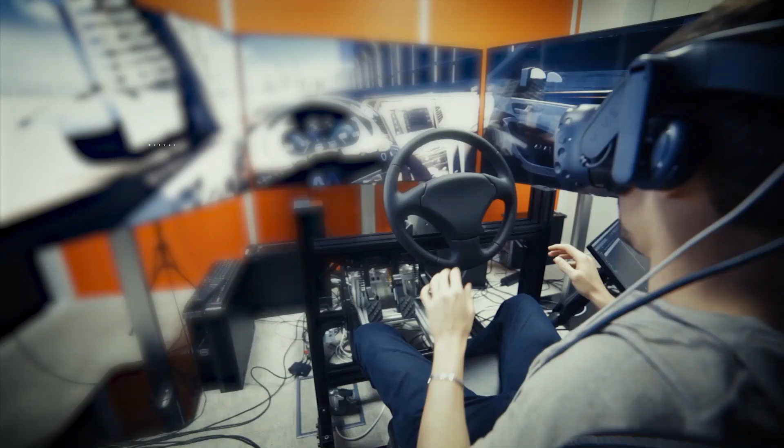ANSYS VR Experience brings the driver in the loop for human factors engineering, connecting real people with virtual simulated vehicles. This solution enables assessment and anticipation of drivers' reactions in any driving situation.

VR Experience recreates a lifelike context to foster drivers' immersion, including realistic driving simulation, scenario and traffic variation, and the shift from automated driving to manual driving, as experienced by test drivers in an accurate and interactive virtual cockpit.

From this, it is easy to monitor situational awareness in the vehicle and the related human reactions, including emergency management and takeover efficiency, and to anticipate situations of foreseeable misuse.

Virtually test and improve the vehicle feedback according to the test driver's behavior and takeover time for haptic, visual, and audio warnings.

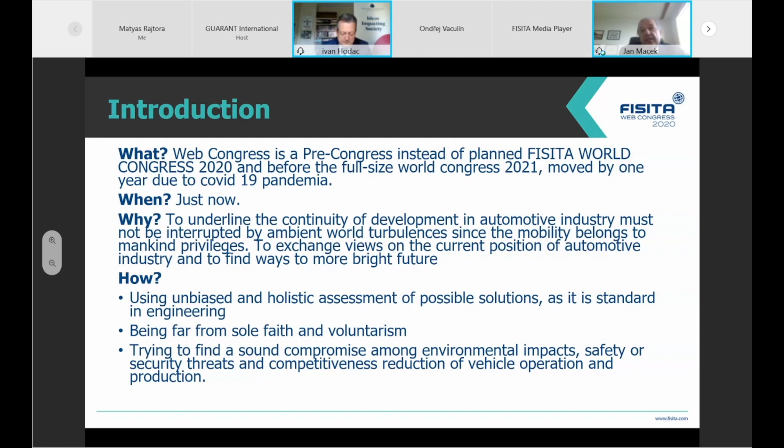How to do it? I think engineers should use unbiased and holistic assessment of possible solutions. We should be far from sole faith and voluntarism, which is not based on the laws of nature, and we should try to find a compromise among all the variety of conditions to which vehicles and mobility tools are subjected.

It is only a technical background, but we know very well that very famous V-shape going from concepts to details of parts and then back to product - any software company, any developer in the automotive industry knows this very well today. Front loading by means of simulation and predictive methods is very important.

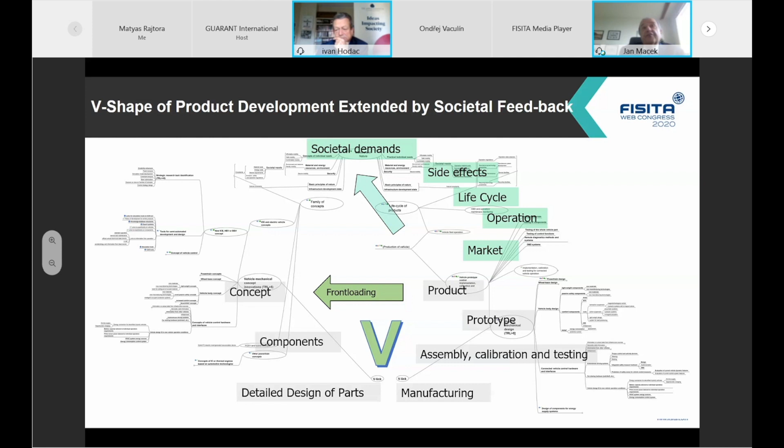to accelerate the concepts. What is also very often used in such a structured way is a path from product over market to life cycle, covering operation, which causes side effects. These side effects are reflected after some time by societal demands, by governmental or higher-level regulations, and also customers' expectations based on media presentations and so on. This is, in fact, like an A-shaped roof for this well-known V-shape.

Of course, the management of any OEM and any supplier of parts uses an intuitive or scientifically based approach from this A-shape. But what we need, and what this Congress stresses, is that we need very strong feedback to the left-hand branch of the A-shape, because the natural feedback, which is caused by laws of nature, is too slow.

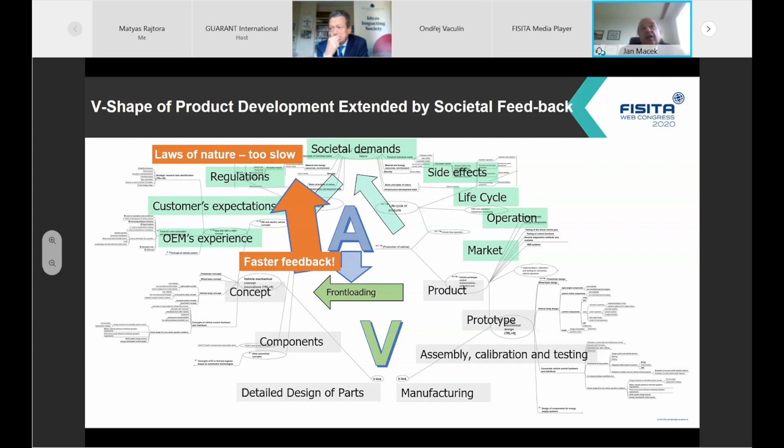So faster feedback from reality, from feasible solutions, should be applied to regulations and customer expectations. I hope that we can answer some of these questions through the papers that will be available, first of all through the keynote speeches which will now follow.

The first one, as you can see, will be Ivan Hodáč, followed by Christoph Gümbel, Dino Flor, Dirk Lappe, and at the end, Martin Hrdlička.

And we are looking forward to the following discussion, as it was already mentioned, with Ondřej Vaculín. So the first referee of keynote lectures is Ivan Hodáč, and I would like to ask him to start with his lecture.

I'm not going to talk about technical issues. I would like to put the situation in which we are today into perspective. The industry is probably going through its most important transformation ever since I remember, and the challenges that we have today are enormous. Let me enumerate them. We know them, but I would like to put them into perspective so we understand in which framework we operate today.

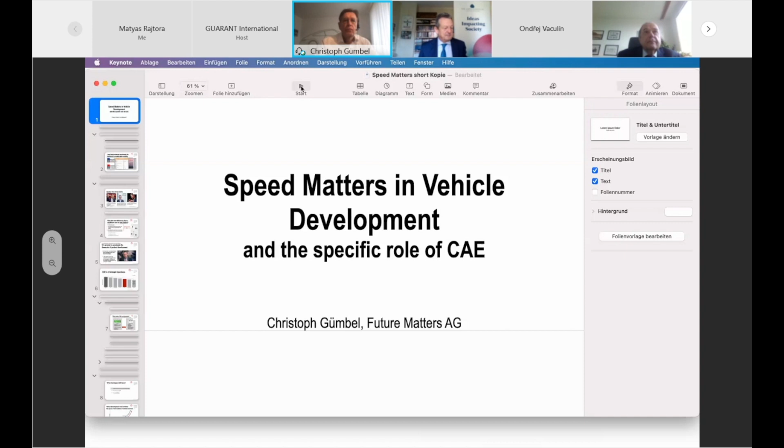That was just a perfect introduction to my presentation, but to what I would like to show you. So I'd just like to start here. I think because time is so tight, I would like to jump directly into the topic and show the first slide.

This slide was just mentioned, or explained almost, by Hodáč. So what do we see? We see a lot of pressure that is generated by legal requirements, these CO2 limits or quotas for importers with respect to electric vehicles, or the discussions in many countries to ban ICE vehicles, which starts in Norway.

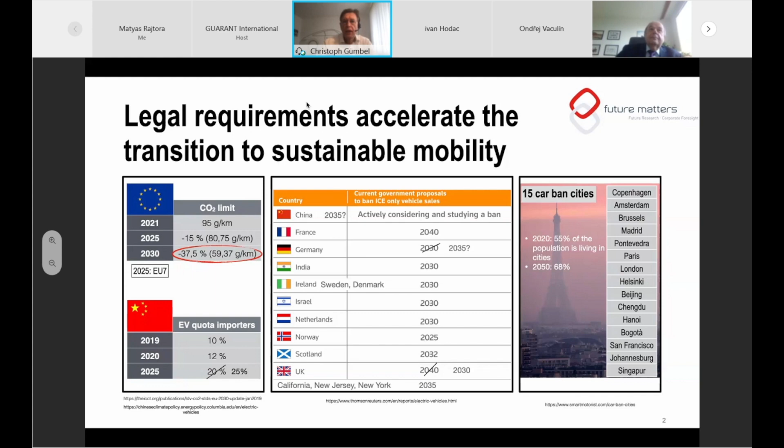We had the discussion with UK, they said okay, they want to start in 2030. We had the discussion with California, New Jersey, New York, they think that they will start to ban ICE vehicles in 2035. And it was also just mentioned that many cities would like to ban ICE cars as well. So this creates a lot of pressure, and we see this.

I've had some quotes from three CEOs. Herbert Diess, who is the CEO of Volkswagen Group, says the world is on the move, the storm is just beginning, the big question is, are we fast enough?

Or Markus Duesmann, the new CEO at Audi, says Tesla is two years ahead - when he says officially two years, perhaps it's a little bit more in terms of computing and software, and in autonomous driving as well. And Ola Kallenius, CEO from Daimler, says there will be no keeping on like you have been doing until now. So we see a big shift from the traditional engineering to a new world which is driven by digitalization.

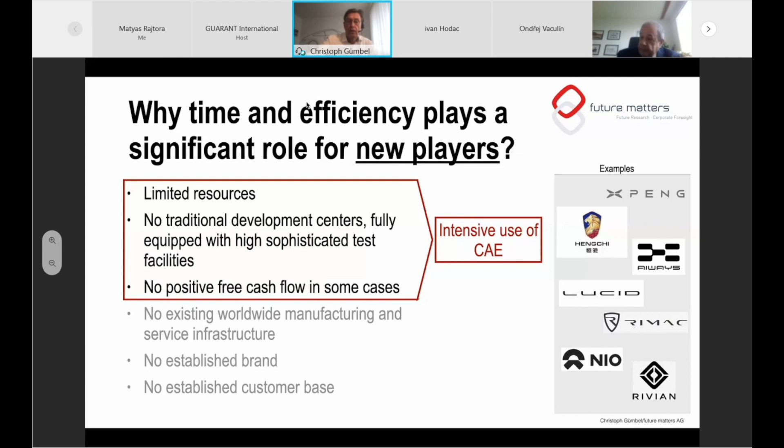So the question is, what happens with the new players? Also mentioned, like Rivian or NIO, Rimac, Lucid Motors, Aiways, and others. They normally have limited resources, no traditional development center fully equipped with sophisticated test facilities, and in some cases still no positive free cash flow. So they are forced to use the most efficient tool, and they're using computer-aided engineering tools intensively.

In January, I visited again Peter Rawlinson, who is CEO and CTO of Lucid Motors. I know him since a couple of years, and I love the discussions with him. He said, okay, we learn so much more from a virtual prototype than from a physical prototype. The reason why we can accelerate development is because we have great confidence in the fidelity and velocity of our computer models.

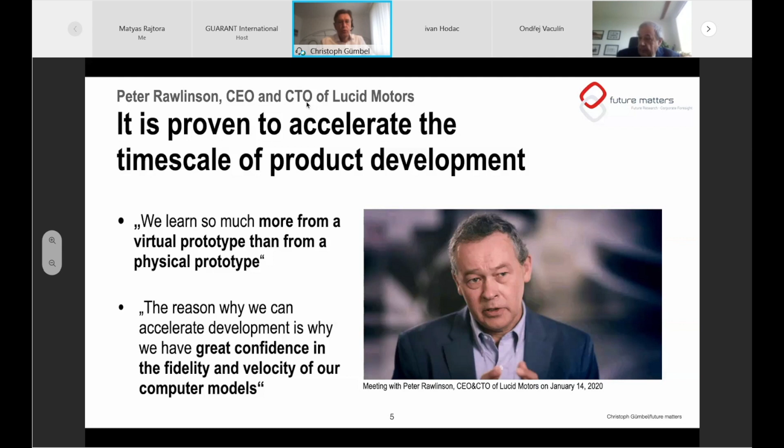So what happens with CAE? CAE is now in a strategic position. What we see in general is we have the status quo, that is what we did with combustion engines and the classical way to develop cars. Then comes the EV. The EV is a little bit simpler, has no exhaust pipe and things like this. They have other challenges, but they have fewer parts.

What we see in addition is shared hardware and software. A nice example is the MEB platform from Volkswagen, which will be shared together with Ford. Another example is software, which it's using from Polestar. Polestar is using Android Automotive. What comes in addition is the over-the-air update.

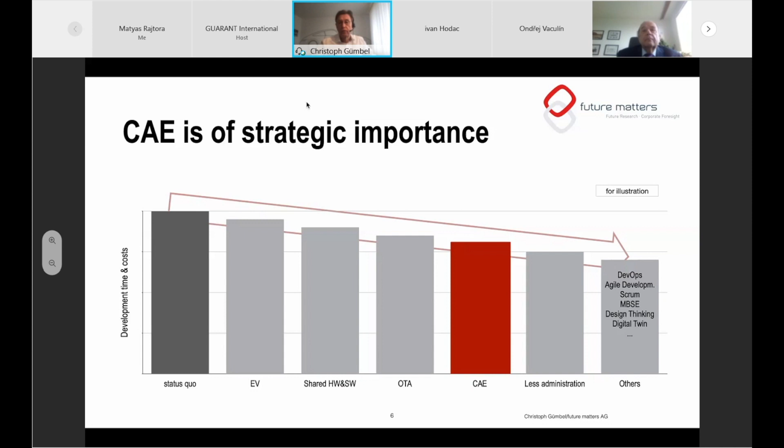Been using this for more than 8 years, and it helps you download software features, also after SOP. That is really disruptive technology. And then CAE and some other things, like less administration, or agile development, Scrum, and so on, design thinking and digital twin. So what makes CAE interesting?

I have a little example. Assume that we have to extend the range. This is the one thing that everybody complains about with electric vehicles, and we have to extend the range with some additional 2 kilowatt hours. So assume the battery price is 100 euros per kilowatt hour, and assume that we produce 300,000 units, lifetime is 7 years, 420 million euros, and we generate additional weight sources.

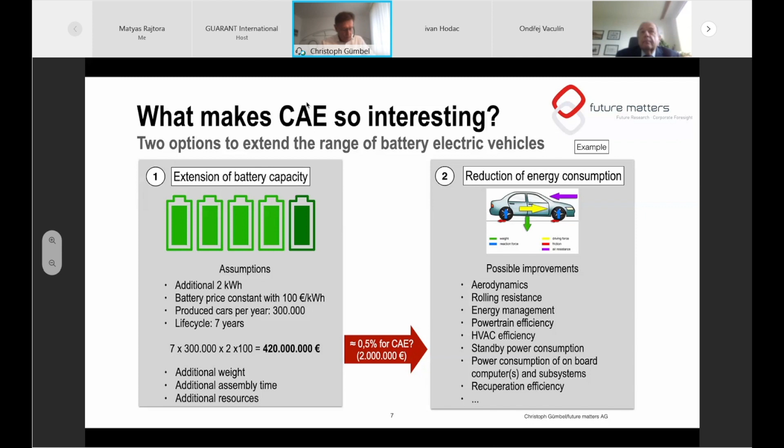And if we take 0.5% for CAE, which will be really a huge amount of money with respect to CAE, with 2 million, and in that case, doing it by computer-aided engineering for rolling resistance or energy management, whatever, HVAC efficiency, then it's really a smart way. And we see that these new players are playing with this tool really extensively.

So the question is, when we would like to use CAE more intensively as a strategic tool, what challenges does CAE face? One challenge is that CAE has to follow the innovation speed. The other one is to increase the process speed and to increase the efficiency.

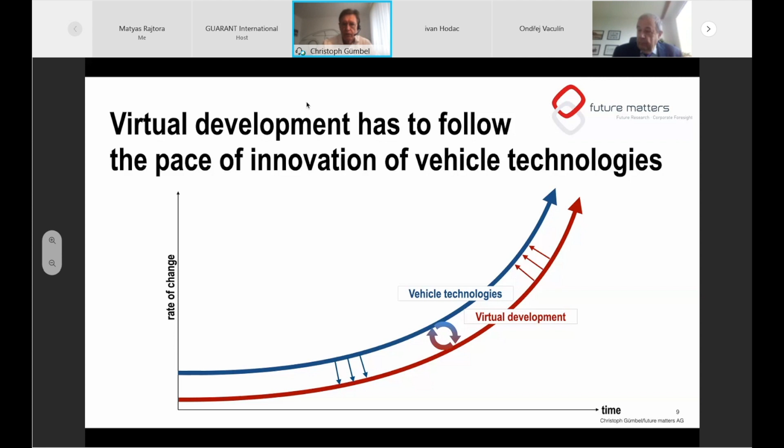So when we have a look at what happens in the automotive industry, we see that the rate of changes is accelerating dramatically, and virtual development has to follow this pace. And even perhaps in the future, as Mr. Hodac just spoke about the pull and push principle, maybe the virtual development process will not only be pushed, but will influence vehicle technology in the future by using artificial intelligence, machine learning processes and technologies. So CAE is an integral part of the development process and has to reflect future vehicle technologies, working hand in hand with the design process, with testing and so on.

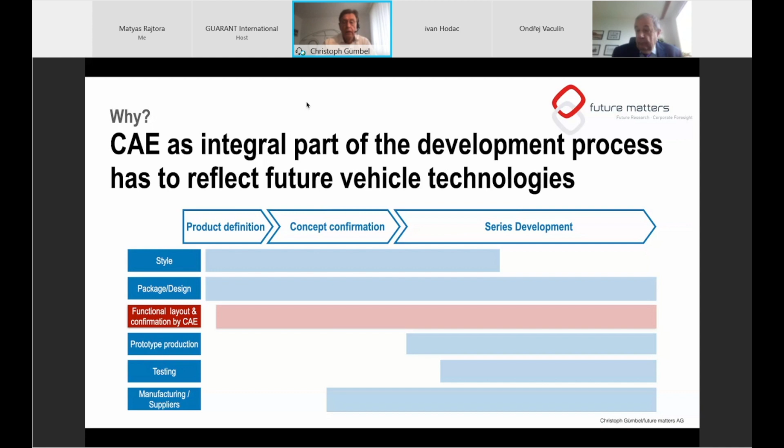So what happens very often, as I've tried to show in this slide, is that we need some information that we have to represent and prepare. Otherwise, our toolbox will not be filled, and then we have a problem with speed, because we have to do everything by classical experimental testing. The tricky thing is that normally the budget is released for a new project when the project starts, but we have to start a bit earlier for validation and procurement, or development of these CAE methods. So you need a separate budget, a couple of years or months, whatever, before.

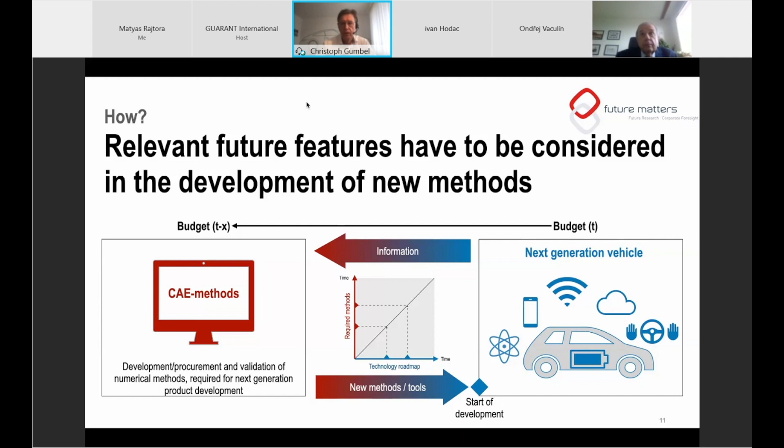So what should the process be? What can we do here? What is the typical process? We have an initial design, then we put all the data into numerical simulation, and the responsible person, the developer, has to wait until the result is available. But he will not stop thinking, so we are here on a critical path.

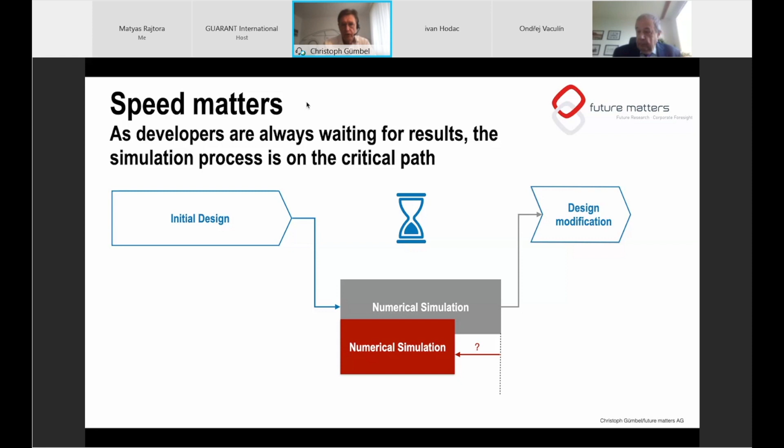Because of time restrictions, I have only selected some ideas on what we can do to speed up the numerical simulation, because one problem is that complexity is even increasing, and as Mr. Hodac just mentioned, there are a lot of legal requirements and different standards to fulfill. This little machine is rotating even faster.

This CAE process, as part of the development process in general, is divided into three main parts: pre-processing where you fill in all the data you need, then the computer which solves all the equations, and then post-processing to visualize the animations and other output. So the efficiency is output divided by effort.

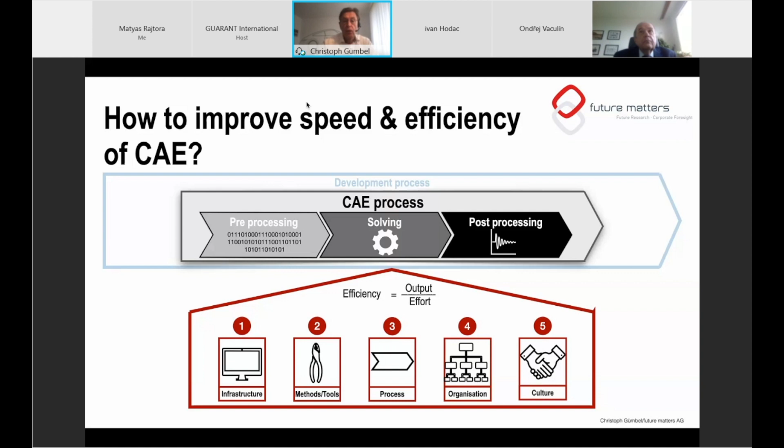So what are the parameters we have? I think we have 5 parameters. This is the infrastructure that we need, methods and tools, then the process itself, then the organization, and what's extremely important besides organization is culture. I would think the importance is growing in this order.

A little example of what happens with infrastructure: normally we have more and more guys creating software and writing software in the office. What we have with driving simulators is central facilities where you have a driving simulator.

When you think about ADAS, for example, with HIL and SIL etc., then you have to wait. You have to book such a facility, a central facility, and that wastes time. So the idea now is to have a downsized, directly positioned desk-side driving simulator.

It's a little bit the idea of a personal computer. In the past you had these host centralized big computers, and you had a terminal. What we have today are personal computers. We have direct access to everything we need, and what is centralized is the computing. We could do the same here.

That helps the engineer using some software to directly test this in the office.

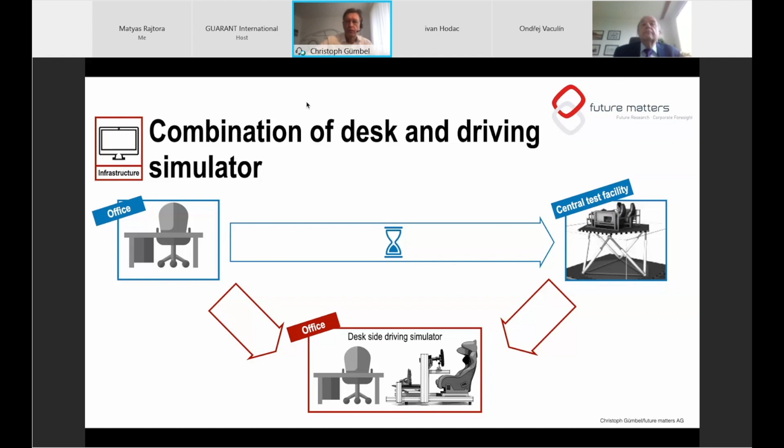So the other example is with methods and tools. Perhaps we can do some simulation a little bit similarly. What we have in the phase of the development process are very often very detailed models, and these detailed models are a little bit difficult to handle.

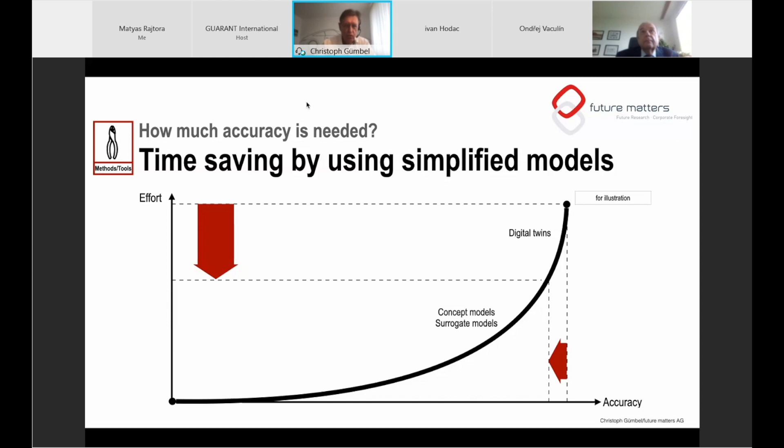The question is, can we use concept models, for example, which are not so detailed, but we generate results extremely fast? So the accuracy is not that good, perhaps 3 or 4% less, but we are much faster, and we have a lot of tools helping us to do this in the right time. This is also a good example where we can save a lot of time.

The other is process, and we think about process and doing things faster. We think about automation. We have a lot already available, building blocks like automesher and parameterized CAD tools.

And we have multidisciplinary tools. We have simulation data management, machine learning, robustness, high performance computers—everything that we need for the automation of the processes.

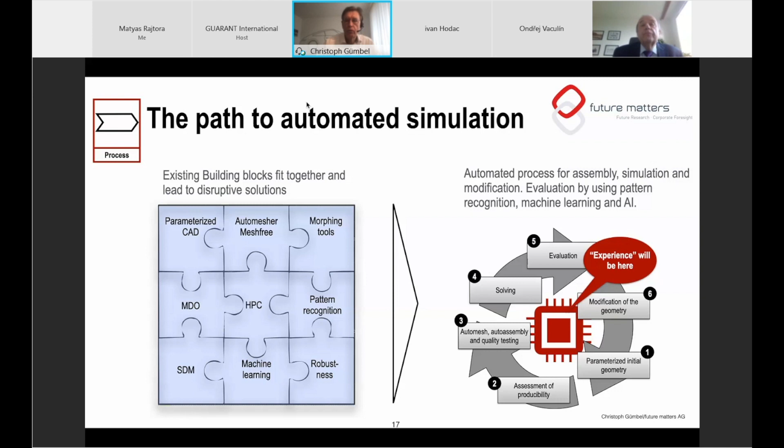And this will be done in the future. The future has already begun. I'd say 4 years ago when we started with this process, and now we see that this is really an extremely good path into the future. But experience will then be in the computer, and we have to handle all this.

How can we increase the efficiency? Asking for conclusions—I'm almost finished. We can have simplified usability.

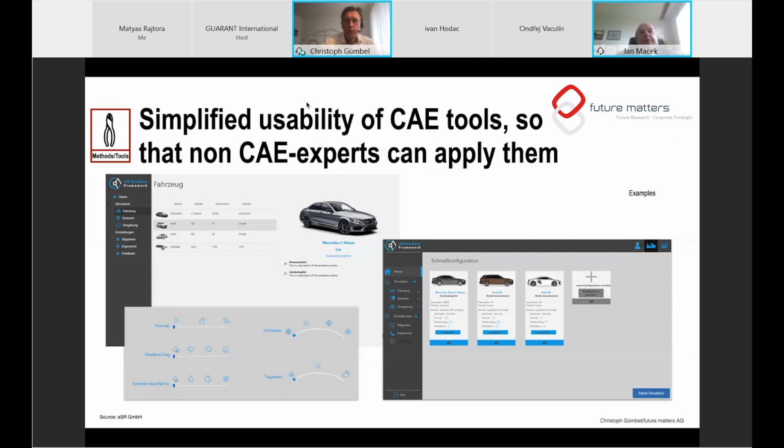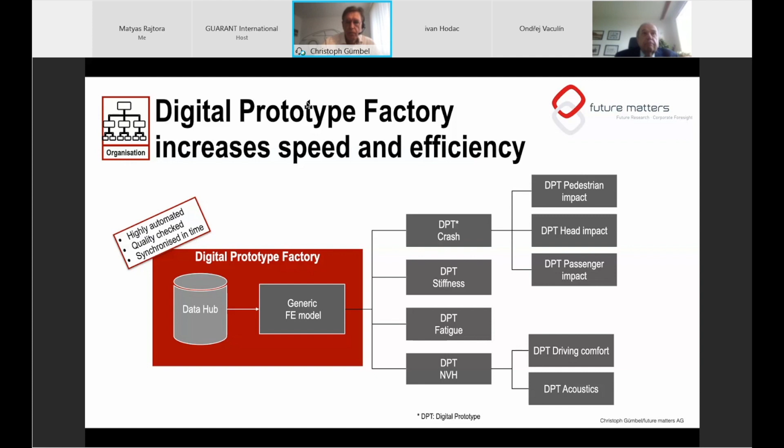We can have centralized data. We can use, like, a digital prototype factory. We do things to get all the others. But what is extremely important, and this is my last chart, is the car-career conflict.

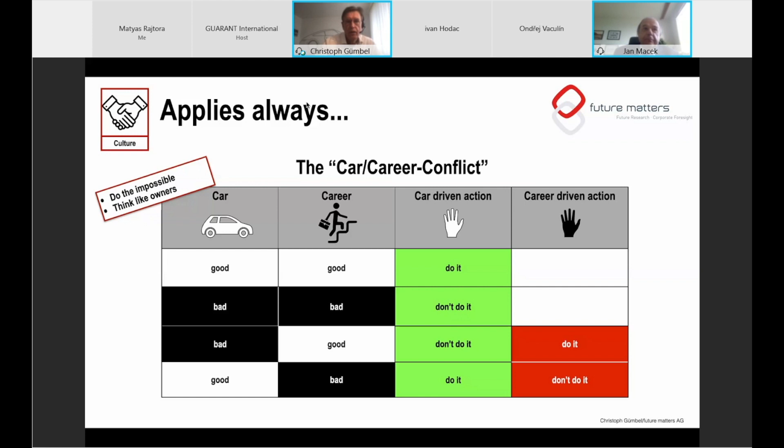Which means: if something is good for the car and good for my career, then do it. But if it's bad for the car and good for my career, you shouldn't—it harms the development process, and this is very often done.

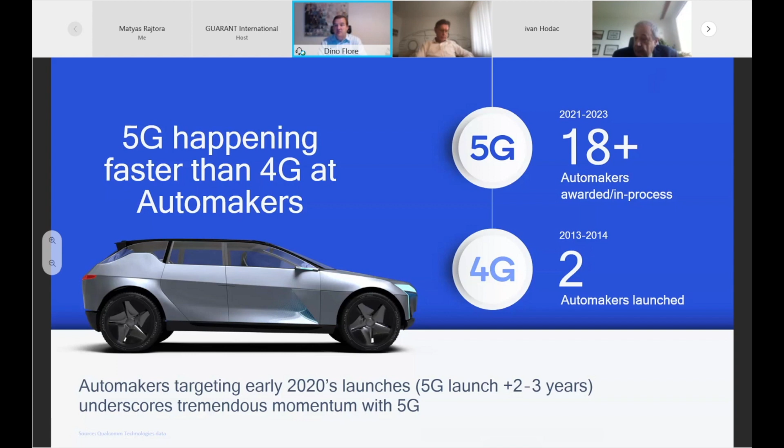If you compare with what happened in the 4G days, there is a tremendous adoption rate. We are already working on about 20 projects with different car automakers that will bring 5G capabilities on the road in the 2021-2023 timeframe. So way faster adoption than 4G.

From a Qualcomm point of view, we are approaching this new era of the car from 4 key areas. One is telematics and C-V2X, bringing the 5G connectivity as well as the car-to-everything connectivity, C-V2X, which I will speak about a bit later.

We are also seeing a transformation of the cockpit, what we call the digital cockpit, for infotainment reasons as well as for some assistance reasons like driver and occupant monitoring and things like that.

We are also introducing a car-to-cloud service where the cloud connectivity will allow more agile over-the-air updates to the car. It will also allow car manufacturers to manage different SKUs worldwide and so on and so forth.

And finally, the big area where we are opening up is the area of ADAS and autonomous driving. Obviously this is something that most of the industry is working on, and we are very excited to provide our contribution with our platform solutions.

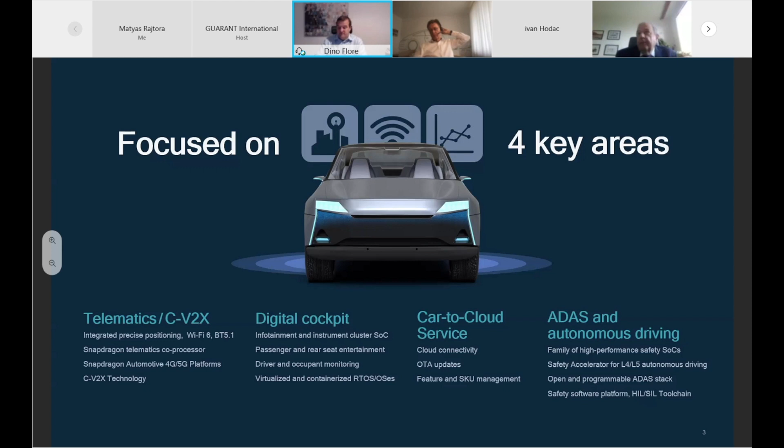The way we look at the 5G area is not as a single connectivity capability getting into the car. The car will be hosting a host of heterogeneous connectivity capabilities, starting from the C-V2X capability I mentioned before, allowing the car to communicate with other cars as well as with infrastructure around it, as well as 5G connectivity, which could be used for infotainment services as well as OEM services like diagnostics or other services like that.

But also in the car, you will have capabilities like Bluetooth, more and more Wi-Fi 6 we are introducing, and advanced positioning that will allow lane level accuracy everywhere, which will again improve the driving experience in the car.

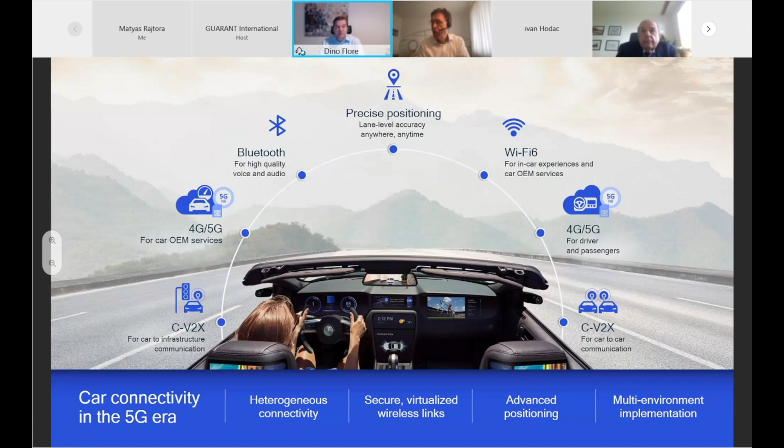A key element also entering the car is artificial intelligence, where more and more functions of the car will be processed by AI and machine learning, and more specifically autonomous driving is the most obvious, because it's all about machine learning, starting from fusing sensors and trying to understand the sensor data, to deciding actions based on that, as well as smart transportation. So it's not only the car that will become more intelligent, also the infrastructure around will be more intelligent, and the car will help the infrastructure become more intelligent.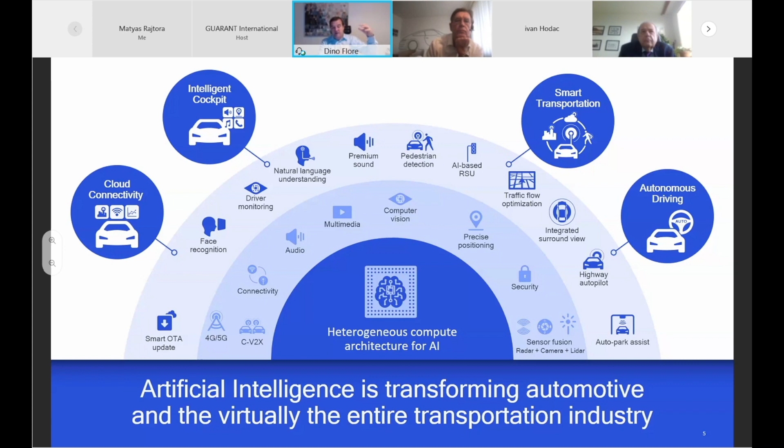We'll see later a bit more about that, as well as there will be a more intelligent cockpit dealing with human interaction, as well as monitoring driver behaviors, as we said before. And the cloud connectivity will allow that level of intelligence in coordination with the cloud capabilities.

And because of this pervasive artificial intelligence touching many aspects of the car, many aspects of the compute system of the car, at Qualcomm we are proposing a platform which enables efficiently scaling AI for the different use cases. And for the case of the car, it's a mobile system in a way, so it has to be done in a very energy efficient way.

So it's not the same AI we were also working on for hyperscalers or servers. In the car, as well as in phones, it has to be done in a very energy efficient way. So we are proposing a framework which allows scaling the different use cases from the very compute intensive to the ones that have to be very power efficient. So it's important to understand that. As Qualcomm, we are well positioned to address this problem, coming from the smartphone background and then applying all that know-how also to the car.

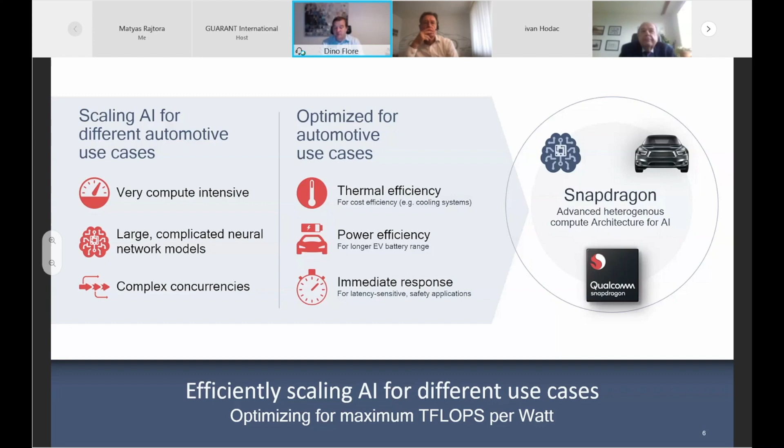So we have introduced a Snapdragon Ride platform, which will allow us to enable autonomous driving and different levels of autonomy. This is a family of system on chips and an inference accelerator for machine learning. Just to signal how important machine learning will be, this platform will have an entire chip dedicated to the inference accelerator, so we can do all these inferences in a very efficient way.

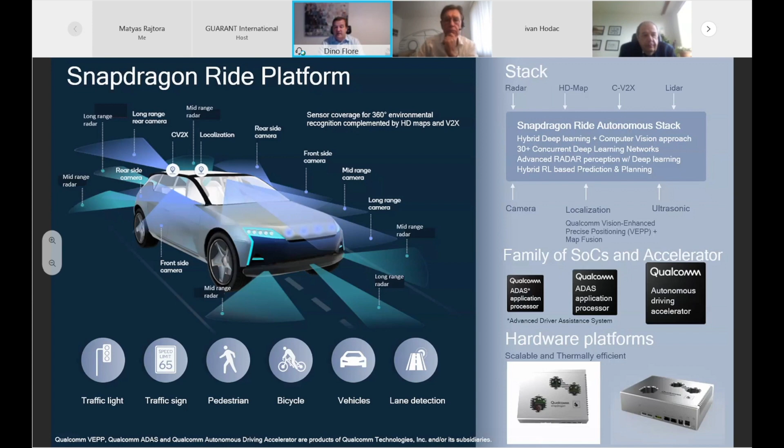As I was saying before, one of the first things the system will have to do is deal with all these sensors, fuse them, and try to understand and plan behaviors based on these different sensors.

As I was mentioning before, the car will be intelligent, but also the infrastructure. The way we are envisioning this transformation is that the city infrastructure, the road infrastructure around it, will also become more intelligent. We are envisioning that, for example, traffic lights could have a roadside unit with an AI-based camera which could detect a hazard situation, like a pedestrian who is about to cross the road or is distracted, and thanks to V2P, V2I connectivity, alert the pedestrian or alert the car so that this hazard situation can be avoided. This is for a short range.

The cloud could then help avoid longer range hazard situations. We have to imagine the infrastructure around us as something intelligent, helping the car make decisions on longer range trajectories and paths to follow, as well as shorter range, avoiding hazard situations like hitting a pedestrian and so on. It's a very exciting future where we're going to rethink the car, the infrastructure around it, and the interaction between the two. This is what I wanted to present today.

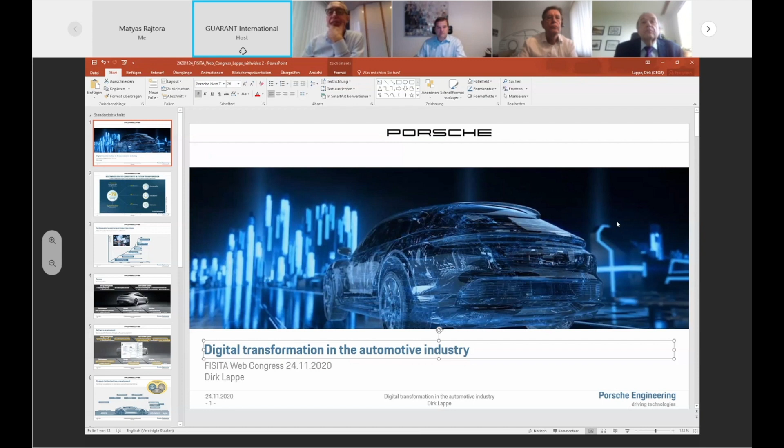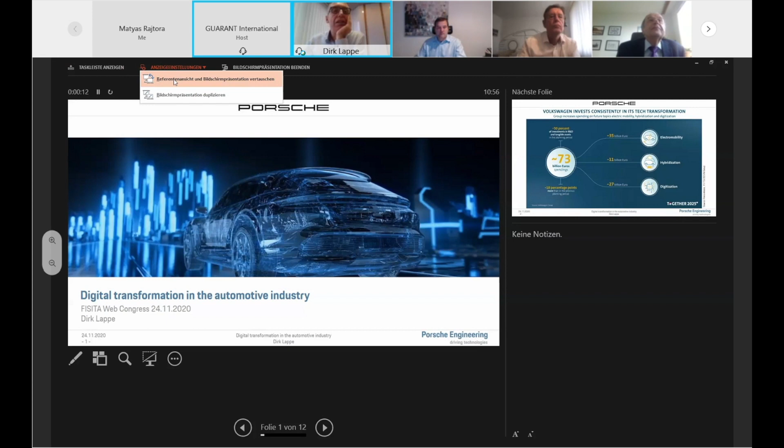Please unmute yourself. What can I do? Can somebody else unmute me at the moment, please? Sorry for that. Yes, you are unmuted, please use F5 for the full screen presentation. Does it work now? It shares now both presenter and main presentation. Sorry, I don't know, this doesn't work at the moment. Just switch between your screens, please. How do I switch between my screens? You are sharing the presentation. Do you hear me now? Hello? Click on the second, on the left side, on the top. Click on the second tool. I don't speak German, sorry. No, on the left side. Go left. I think I'm completely out now. Start sharing your presentation, press F5. Yes. Now I have F5, and click on the display settings. Yeah, okay, and switch between the screens. Yes. Now you can start, thank you.

Do you hear my voice? Do you hear my voice? Yes. Okay, thank you, sorry, I was muted the whole time. Sorry for that. So I'll start.

Currently, the automotive industry is driven by major changes. Ivan Hodak just presented in great detail the actual situation. Besides the regulatory framework around us, as engineers developing cars for the future, we have to follow also the money streams. From this perspective, I would like to share with you the actual investments from Volkswagen, which are planned for the coming years. These main investments go in the direction of e-mobility, hybridization, and digitalization.

There's so much effort and so much money involved that, from our perspective, it's impossible to do all this with new engineers coming from universities. We have to transform not just the product, but also help our existing engineers realize they are not working in the same direction as in the past 10 years. They also have to switch and swap into complete new areas. What we need is something like flexible specialists, who keep their roots and background, all their mechanical background, but also look into digitalization. This is, I think, the most complicated task we all have in front of us.

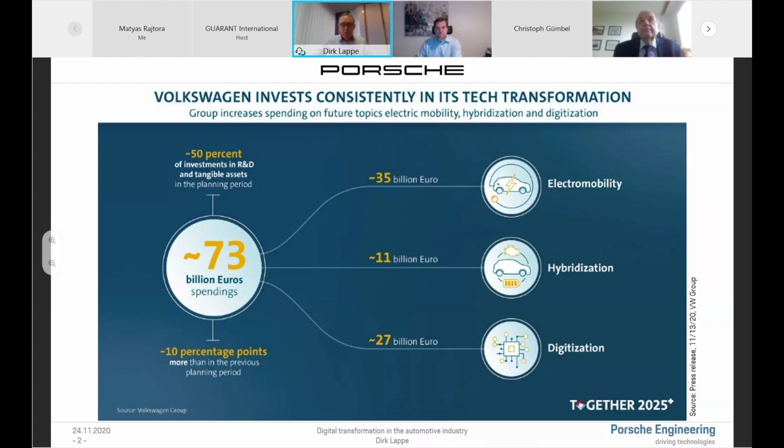An engineer today cannot work the next 5 years on the same topic as in the past. He has to learn much more than before in order to keep up with this transformation process. This is not really new. If you look back, at the beginning we had pure mechanical systems in our cars. Then there was an evolution to mechatronic systems. Everybody remembers that, maybe. Then came the first lane departure warnings and driver assistance systems. Connectivity became more advanced. And in the future, we will have big data and cloud connectivity, and we will end up with automated driving. This process leads to much more technical complexity and a much greater need for software.

It is only 11 years ago where Porsche decided to make the first PHEV car. At that time, just one year before, PHEV was seen as not important, but 11 years ago the first PHEV was decided, and at that time it was impossible to think that Porsche really wants a BEV.

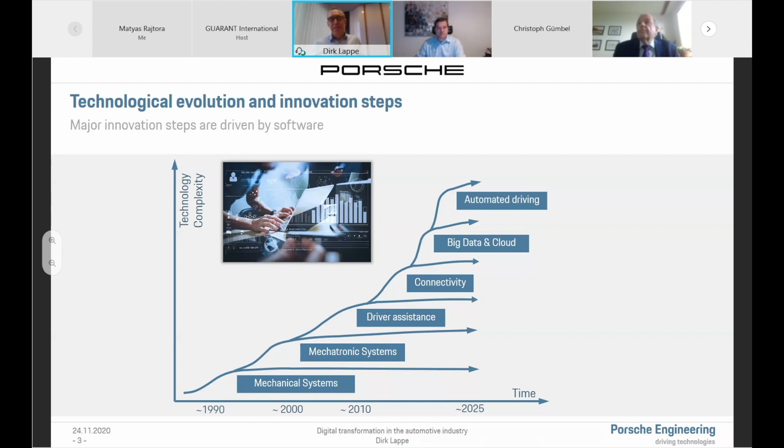Meanwhile, we have the first Porsche BEV, and this shows the disruption happening in this area now, because at the moment we have a car which is completely new. It has so much software inside.

If you look at the different components, we have things like a Porsche Intelligent Range Manager, mainly driven by software. The recuperation of that car is mainly driven by software. For the suspension, in addition to the mechanical components, the complete driving behavior of the car is driven by software. The performance, the complete aerodynamics, everything is based on very powerful hardware, but mainly driven by software. And this will grow over the years and become more and more important for the future.

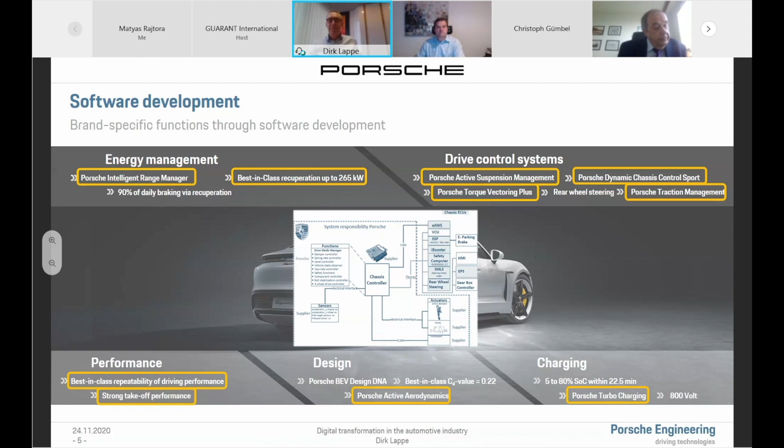That is the reason why, from an engineering perspective, we have different fields for strategic development. We look strongly at vehicle dynamics, at advanced driver assistance systems, automated driving, and mobility in the complete sense, from battery to e-drive. Infotainment is important, as mentioned before, and connectivity, but what we should not forget in developing software, and this is very important, is we should also look at the processes.

So we have to deliver software at a very high quality. Software becomes more and more complex, and the minimum level for serious software is ASPICE level 2. We should not forget, in software development, to concentrate also on these quality issues.

In the second half of my speech, I would like to mention that we use today, for timing and efficiency, artificial intelligence in different ways. We use artificial intelligence for automated testing, but we also use it inside the car for functional components. And finally, of course, we need artificial intelligence to achieve autonomous driving at a level higher than 3.

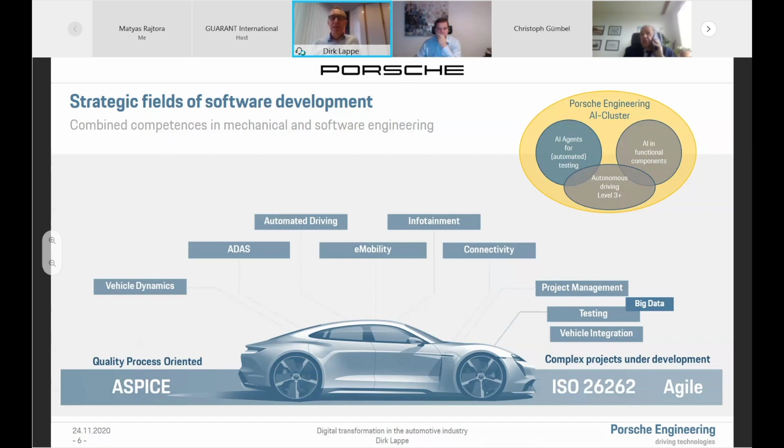I'll give you some examples from the development. It has also to do with process speed. We use cloud computing. Here's a simple example: typically, from a test car, it takes 5 days until the first results are on the working desk of an engineer. It has to do with data transfer, data selection, data evaluation, and then data processing.

What we have started now is that we made interviews with experts, and we built intelligent cloud systems which do a lot of the work that normally an engineer would do inside the car, which can now be done offsite from the working desk. That would mean that in one test drive, via this ComBox, the complete data is collected, there's data analytics, and all the data goes into the cloud. Later on, the engineer can, without sitting in the car, extract all the information he needs. This saves a lot of money and is a very complex and intelligent system.

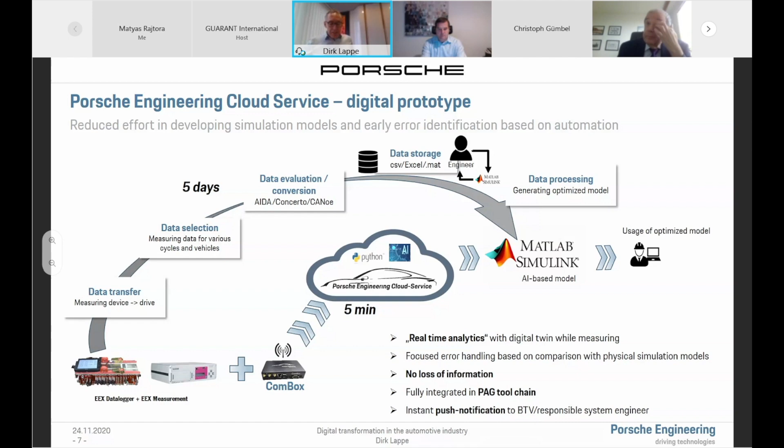The trick here is that we take the information that normally the human gathers over a 5 day period and put it in the cloud as an automated process. The next example is also very interesting.

Currently we have products in the market for adaptive cruise control, and this product is normally relatively uncomfortable because, in case of a cut-in, this could be safety critical. The car has to react in advance, and in order to have some security gap in the timing, in most cases it brakes too hard and too early. By using artificial intelligence, which analyzes the scenery, we can be much faster, up to 2 seconds faster.

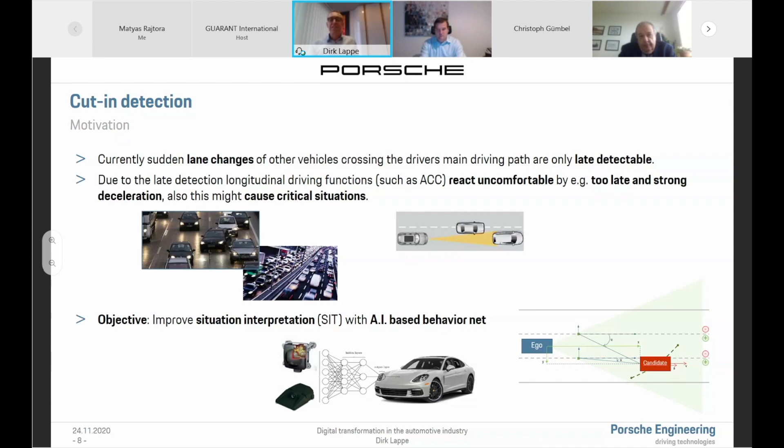Cut-in detection can be realized and seen by the car, which can react safely and securely. But how can we define such corner cases, such as cut-in detection? If you look, for example, this is a very simple example.

We have here 3 cars: my own car, my ego car, the actual leading car which my adaptive cruise control is taking the distance from, and here's a car which will probably do a cut-in in a few milliseconds. If this happens, suddenly this car is in the situation to be the leading car, and the distance between these 2 cars has been recalculated. What is important is that the lanes where the car is in between are still the same. So this is one corner case.

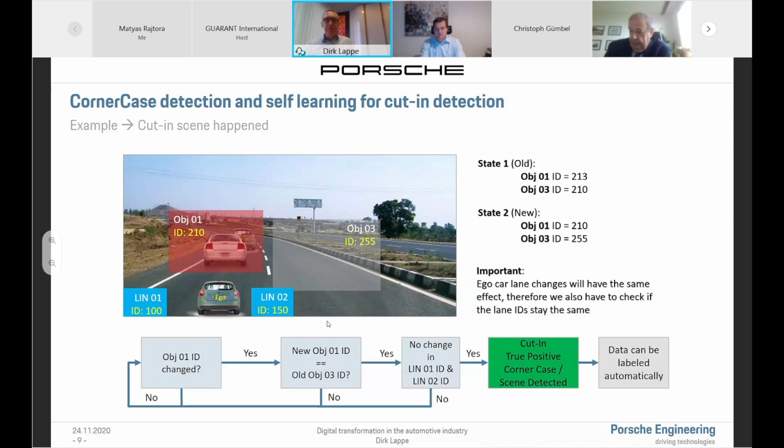You can also think about corner cases where a motorcycle is in the shadow of a truck and is coming out. In order to have a product, you have so many multiple permutations of these situations that it's impossible to do that in real time in real tests. That is the reason why we use much more corner case detection and use software to produce hundreds of thousands of such corner cases for the development.

The extension of that is that we realize inside the car, we have an intelligence inside the car for the testing, where we make an analysis with artificial intelligence in order to extract the data before they are transmitted to the cloud and to the test engineer. By making an analysis inside the car - for example, this analysis detects if a pothole is detected - then not the complete video from the drive will be transmitted to the cloud, but only this type of video which shows the pothole and the reaction of the chassis on this pothole. And again, the engineer on this working desk can make an extract. So there's one test drive, and you can have 5 or 6 results out of the drive without being in the car yourself.

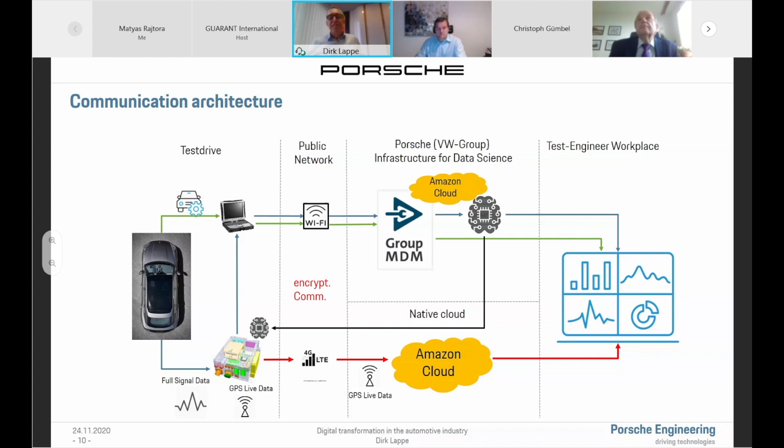I would like to show now, before I finish my speech, a small video which shows the elevation data, the test cases, and the vehicle simulation and the road data. These are combined in such a way that from hundreds of corner cases, a neural network is taught and finally finds its way into the final product.

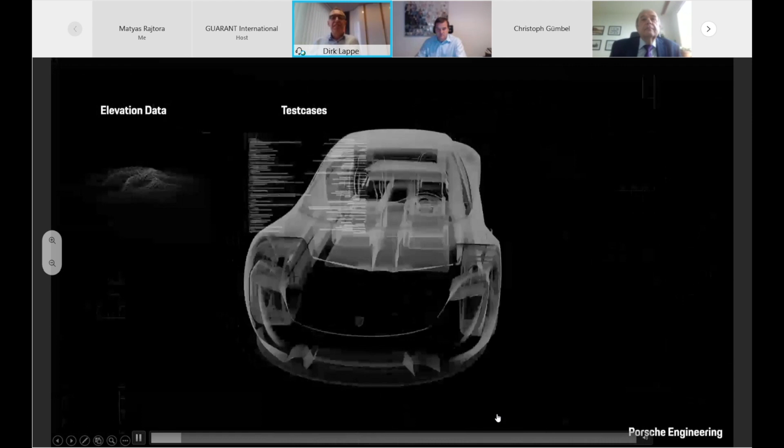I hope this starts... It starts. Elevation data, test cases, vehicle simulation, road data.

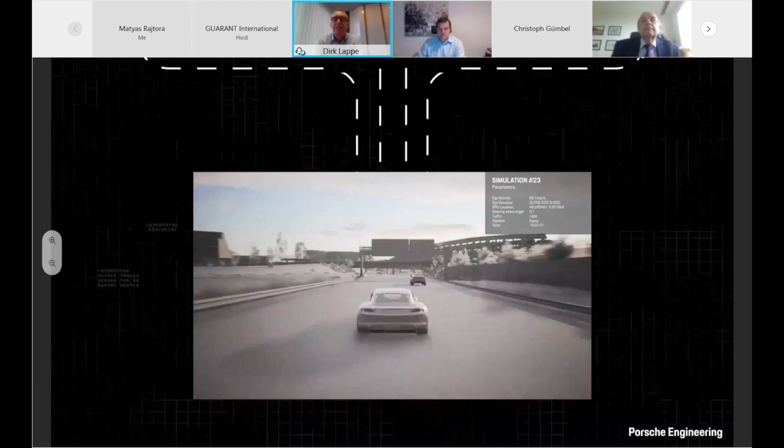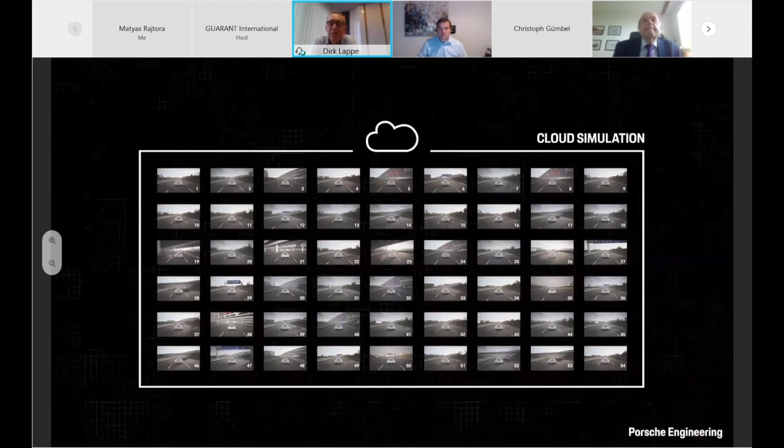Now we define the first corner case. This is collected. Out of this scenery, we produce now many more with different light, different shadows, rain, fog, whatever you want to have. And we train with this scenery a neural network. This is simulation data, and this could be then used in the real car in the real drive. So what happens here in the simulation will be also available in the real car, and there's in the look and feel no difference between the virtual environment and the real environment.

I would like to finish my speech with a short summary. In the future, and already today, there's a development process where the real car is using virtual sensors, virtual actors. In the development, we could use a complete car model inside a virtual environment. The way of working here is sometimes a little bit like working for a computer game, because you have the real car here, virtual persons, and you can always swap between real information, virtual information, in order to reduce as many training kilometers on the real street and to reduce costs as much as possible.

For the future of the development and the transformation process, I would like that you take 3 words home for that. We will be in the future much more digital. The products will become much more premium because of these new software and development components. And of course, the cars will be much more connected.

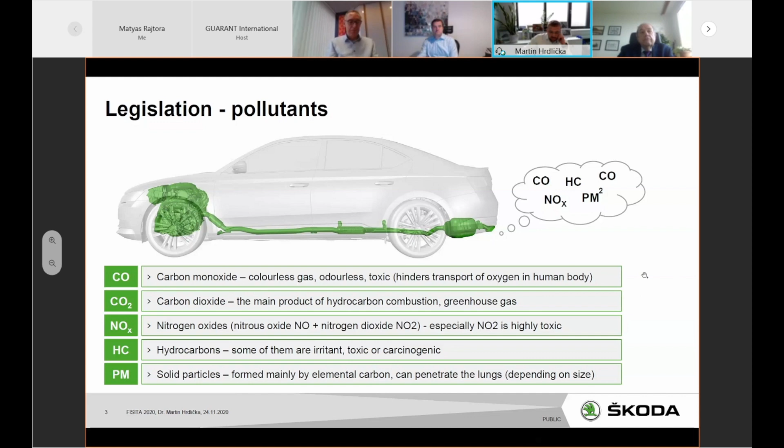EU emission legislation history is very interesting. As you can see, the start with EU Euro 0 in 1970 was based only on 20 pages. Euro 4 already has 10 times more pages, and the latest legislation, EU 6 AP, has 100 times more pages, together with real drive emission and WLTP.

The emission legislation is not easy text, as you can see in the bubble. It is an example of a typical text. It is not easy text, and a technician normally couldn't understand it. So it is necessary to interpret this text to have a clear idea what influence this legislation will have on product design, to production facilities, laboratory equipment, quality department, etc.

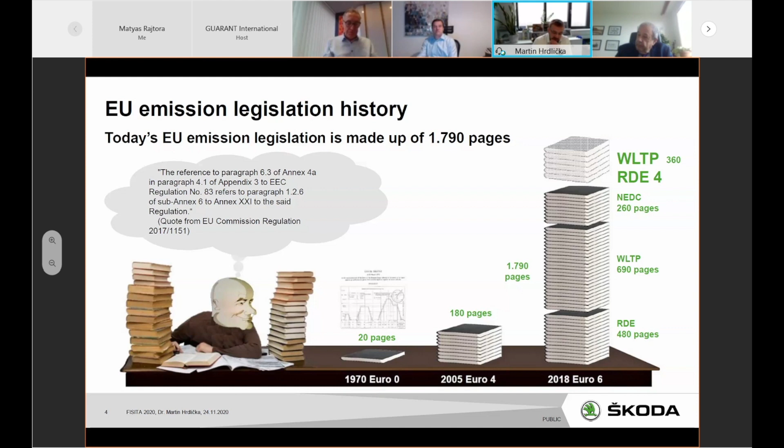The emission standards developed also over time, and on this page I would like to explain two important factors: the validity time of a legislation, as you can see EU6W was valid for almost 4 years, and the time from legislation approval to entry into force.

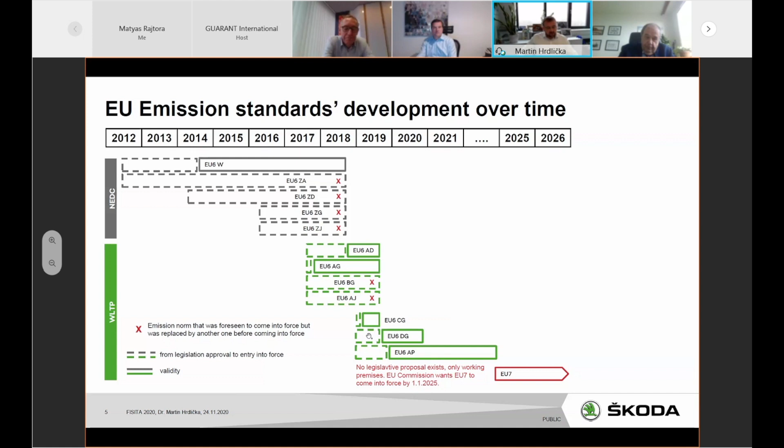EU6W was approved in 2012, and EU6W entered into force in 2014. So we had 2 years time to prepare all quality production, design of engines, and so on. Both timelines are shorter now, so the time for legislation approval to entry into force, as you can see, could be also only weeks, and with the changes in the last 3 years, we have every year a new legislation. The consequences are not only that we have to homologate every year, but we have to develop new hardware, new software, we have to invest, and of course the amortization is big for our economics.

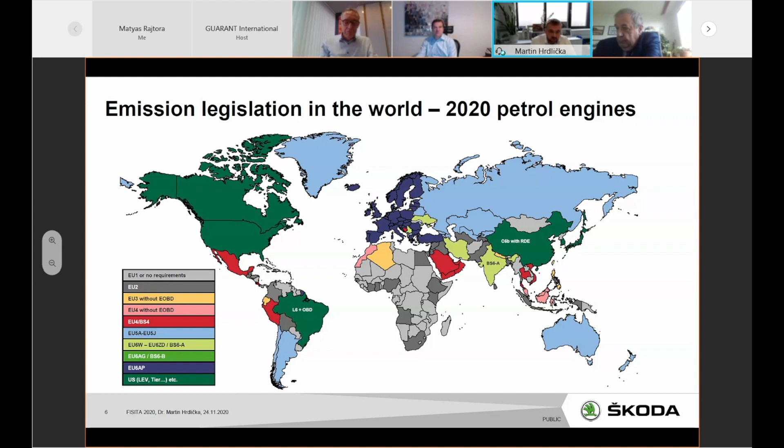The next point is the legislation is not the same in the whole world. As you can see, on an example of petrol engines, this chart is very colorful due to petrol quality, climatic conditions, politics, market protection, and also people's purchasing and living standards. We have a really colorful life in point of legislation. So in China, C6B with RDE, in India, Bharat stage 6, stage A, as you can see, Africa, EU1, EU2, or no emissions legislation, and so on.

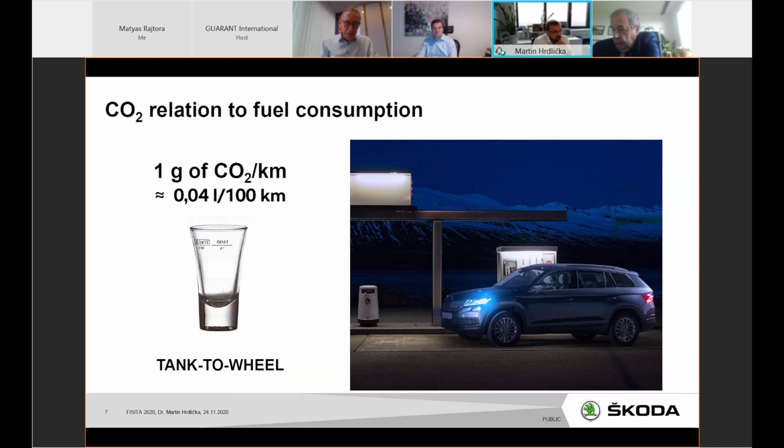To explain the linear relation between CO2 and fuel consumption by way of an example, I would like to use a vivid imagination of a typical Czech example, which is a shot of spirit, alcohol. It means, based on tank to wheel, 1 gram of CO2 per kilometer is 0.04 liter per 100 kilometer. It means if you have a fuel consumption of 4 liters petrol per 100 kilometer, you emit 100 grams of CO2. So every time you drink a shot, you can remember this example.

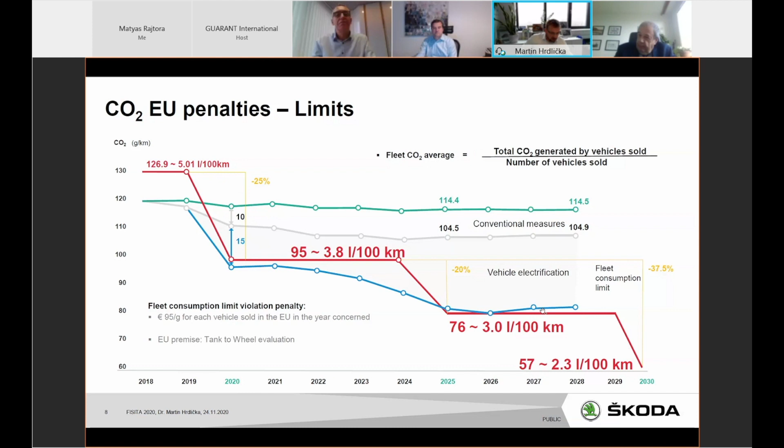So electrification of a vehicle is necessary, because the EU Commission, per definition, takes a battery electric vehicle as having zero CO2 emissions, because it is the premise of tank to wheel evaluation. So you can very easily calculate how many electric vehicles it's necessary to sell in the European Union to achieve a limit of 95, or later 76, or 57. I think in the next year, in June 2021, a check is planned, then discussion about the years 25 and 30, and I think the European Commission would like to have stronger limits.

The next point is cities and air quality, not only CO2. We have EU legislation, but there are also hygienic standards for air quality in the cities, and there are discussions, for example, that diesel cars could be or are prohibited from entering city centers, restrictions and so on.

The discussion is very interesting, because the corona lockdown implicated almost no traffic in the cities, and the surprise was that NOx and particles didn't decrease. At least the correlation between traffic and NOx is maybe not as strong as was assumed. Some cigarettes or advent wreath produce 10 or 100 times more NOx. On this point I would like to only show that these hygienic standards are important, but air quality is also a relative discussion.

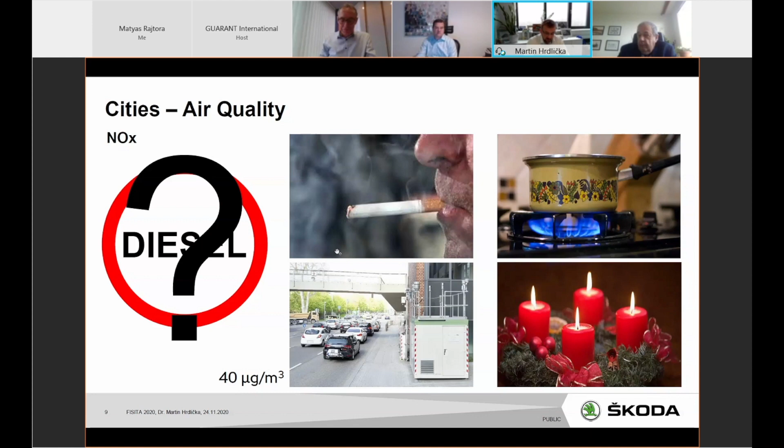The people and the welfare, the living standard and prosperity in the world is also a big topic for traffic. The population on the planet is 7.7 billion, which is twice more than was on the planet when I was born 50 years ago. In sum, I think there are 1.3 billion passenger cars on the planet, in different places.

Only to imagine, in 1994 in India there were 6 million cars registered, and as I mentioned at the start of my presentation, these days in Czech Republic we have 6 million cars registered. These days in India they have 24 million cars registered, and India produces about 5 million cars every year.

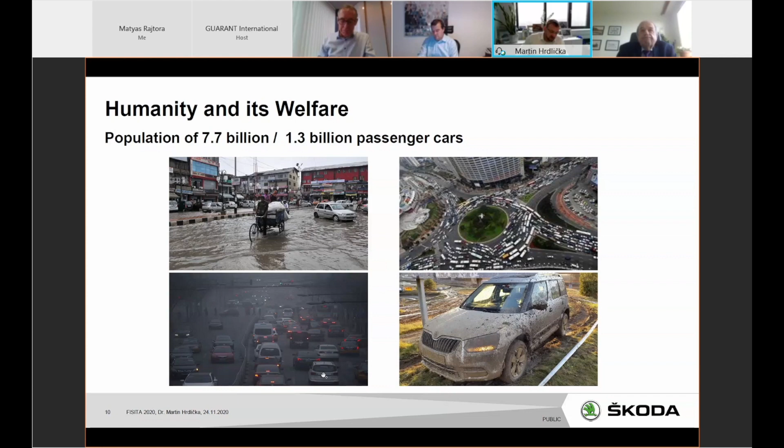So public transport increases not only because of population increase, but welfare and prosperity are higher. The economy is, of course, an important factor, and the Czech Republic is a very good example of it. The share of Czech Republic's GDP from automotive is 9%, which is the highest share in the world.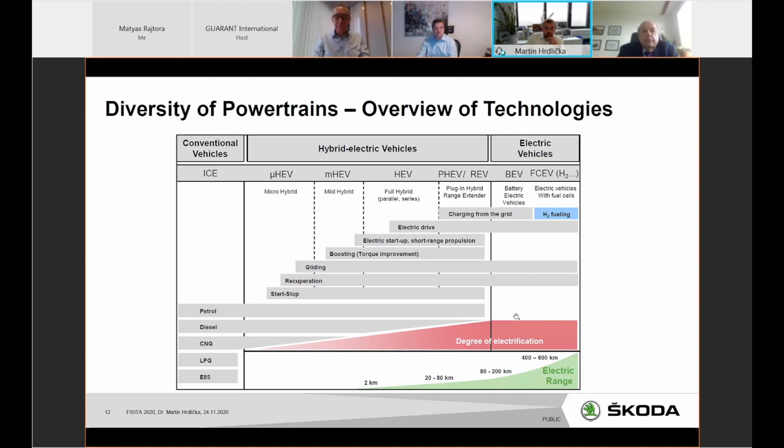The powertrains in the last year - the diversity of powertrains is really high, from internal combustion, hybrid electric vehicles, to electric vehicles, and we will meet really diverse powertrains on the roads in the next years.

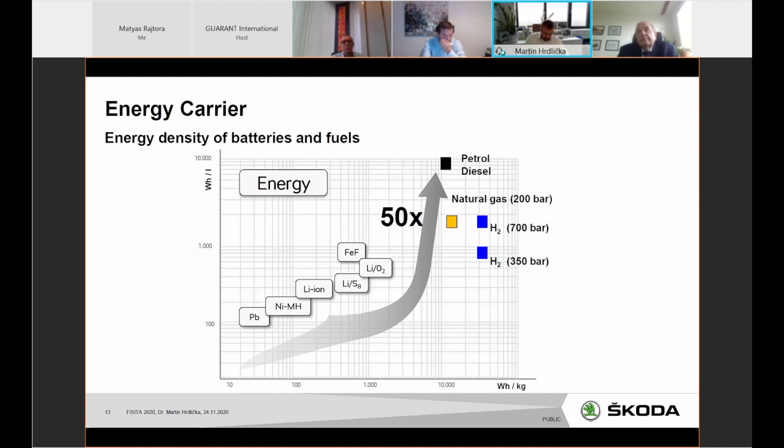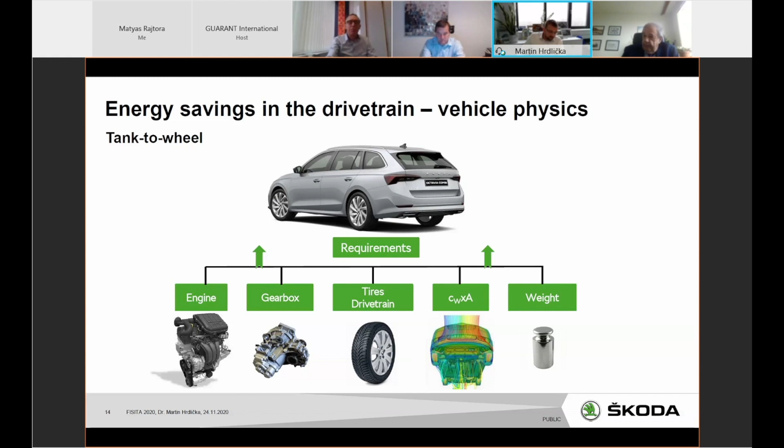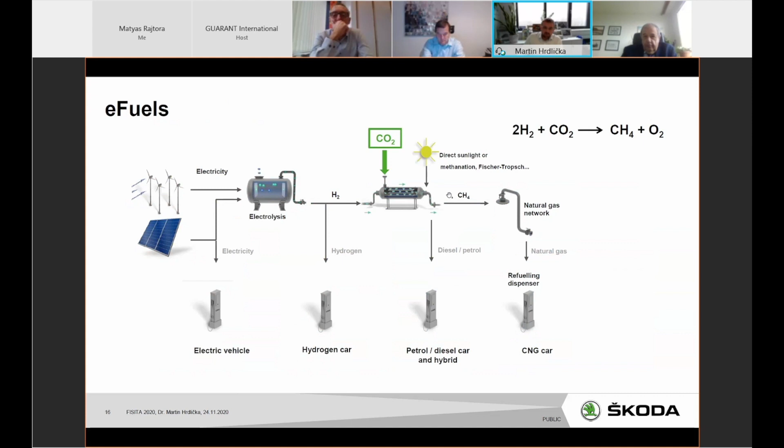The conventional physics of how to achieve lower energy consumption are clear. The alternative fuels are also already on the market, and I would like to focus only on e-fuels - fuels which are produced with the help of clean energy, which is of course air, sun, or atomic power, and then we can also use CO2 as an input to reduce emissions.

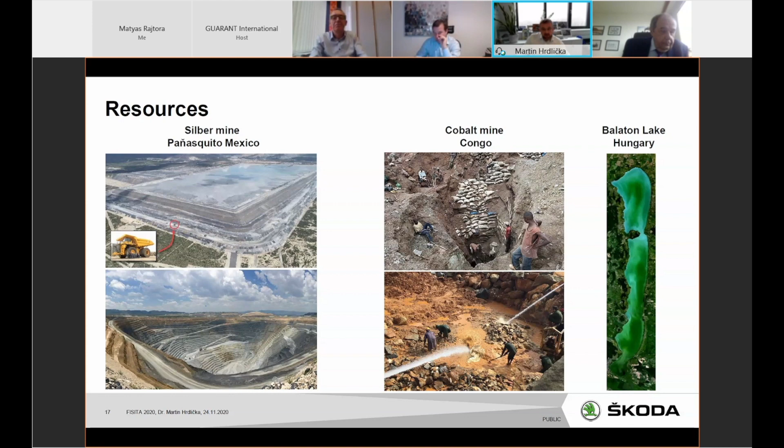But resources are also necessary to mention - not only on the right side the Balaton Lake, because I counted that people consume every year 4 Balaton lakes full of oil. But on the other side, it is important to say a silver mine which has a surface of 60 square kilometers - 130 such mines would be needed to have clean energy, or cobalt mines in Congo, and so on. So resources are still an important point, and strategically I think at the moment mostly China owns the mining rights in Congo, South Africa, and so on.